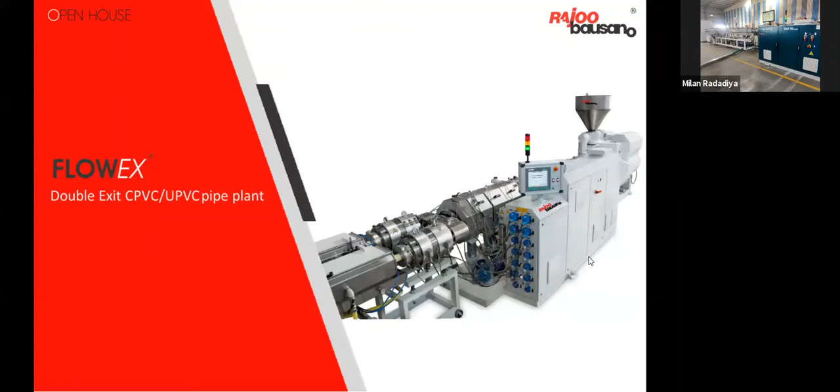And first, we are going to see our high output CPVC line. The model we are going to witness today is a FlowEx RBMD 7530 63 double exit. This is the dual exit production line, the material we are producing is CPVC, and the pipe diameter is 1 inch. When we run CPVC, the machine output will be 330 kgs per hour, and since it is a versatile machine, on the same machine we can run UPVC material as well, and with UPVC the machine output will be 475 kgs per hour.

This is a parallel screw technology. Screw diameter is 75 mm and the L/D ratio is 30:1. We are using our patented and very unique gearbox technology called multi-drive on all our twin screw extruders. So in this scenario also, we have two motors mounted on the gearbox, 18.5 kilowatt each. So in total, there is only 37 kilowatt of load on the gearbox. Power consumption we are observing on this line is as low as 0.17 unit per kg.

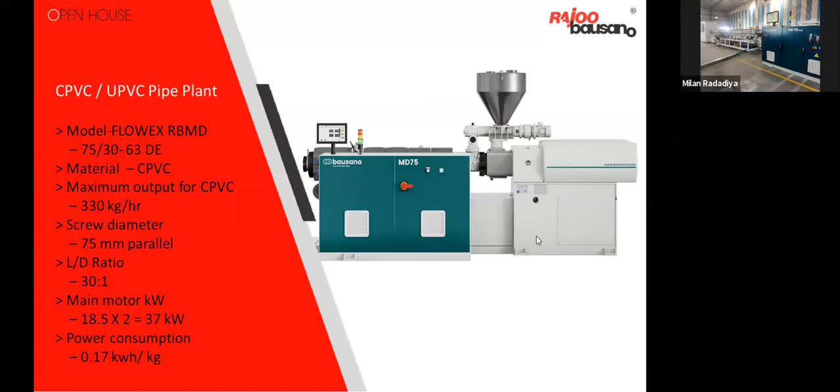For the pipe production line, the maximum output we can offer is 2200 kgs per hour, and the diameter range can be 15 mm to 1000 mm. So with this, let's move on to our shop floor and have a look at the running line.

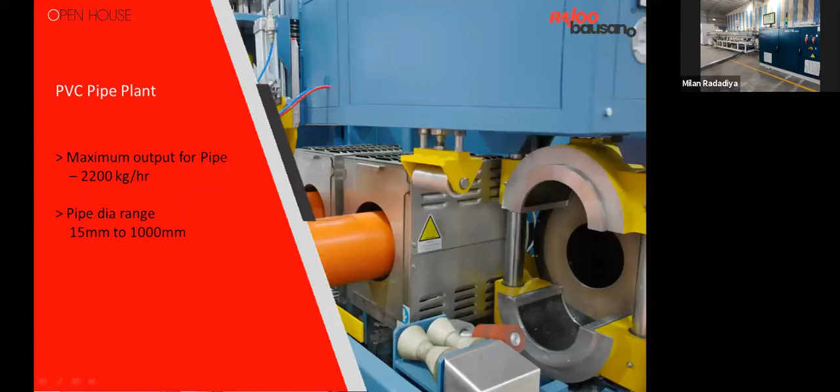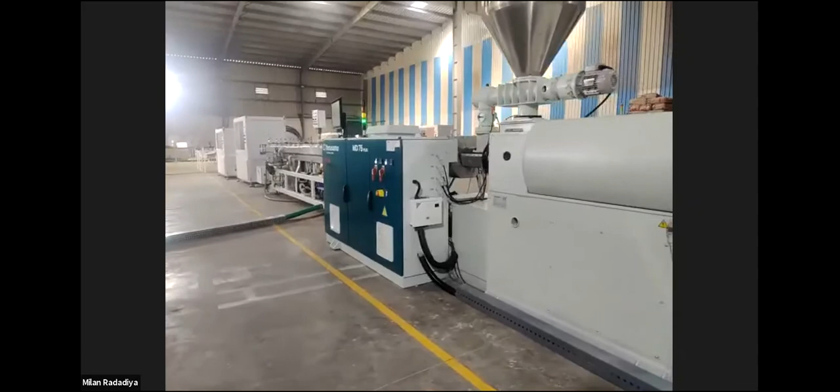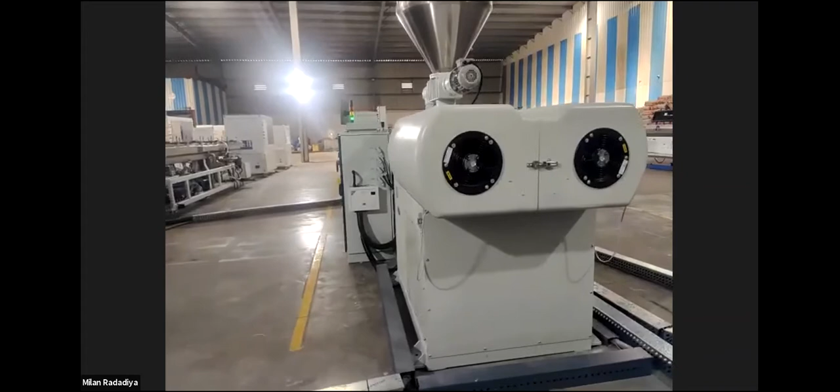Thank you, Milan. We can see here the running machine. As I mentioned, the machine model is FlowEx RBMD 7530 63 double exit. This is the dual exit line since we are running a smaller diameter of pipe. The material we are processing is CPVC and the diameter on the die head is 1 inch. We'll go through the features of this machine one by one, and at the very first, we can see here the multi-drive gearbox technology.

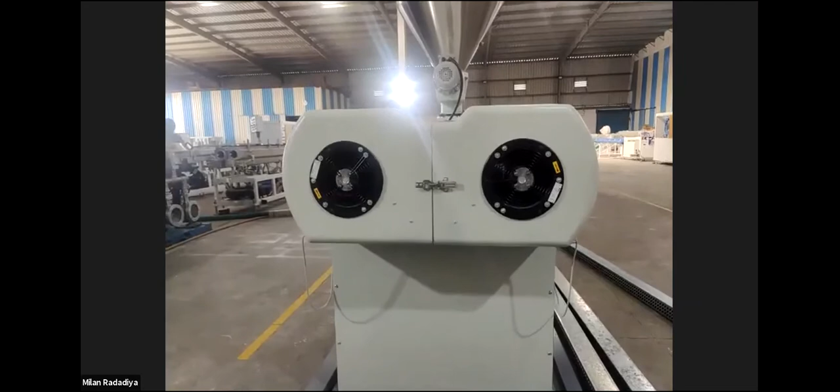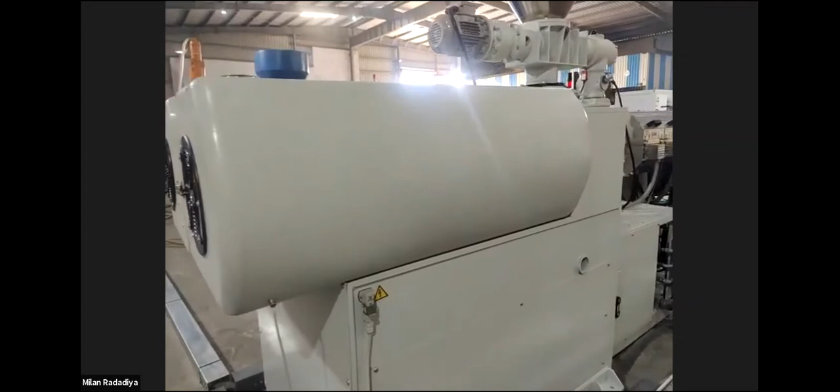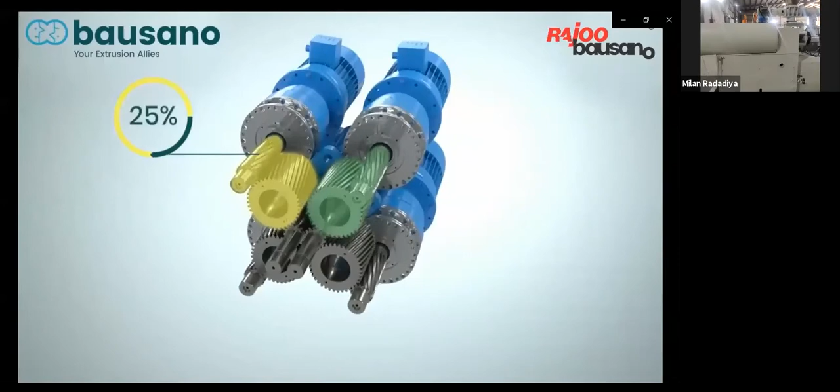Here we have a simple mechanism of a multi-drive gearbox. We can see here this is the four motor concept, four motors directly coupled on the gearbox, and whatever torque is being generated on the screw or on the gearbox is equally distributed among all the four motors. Also, the torsion stress is completely eliminated because of its simple mechanism.

Therefore, the first advantage we can observe here is we can achieve a high output with a very small amount of kilowatt installed, or a small capacity of motor installed, and we can save on power by as much as 40%. Another advantage of this technology is that since the torsion stress is completely eliminated and the torque is subdivided between both the screws, we can always observe a very high service life of critical components like the screw, barrel, and gearbox.

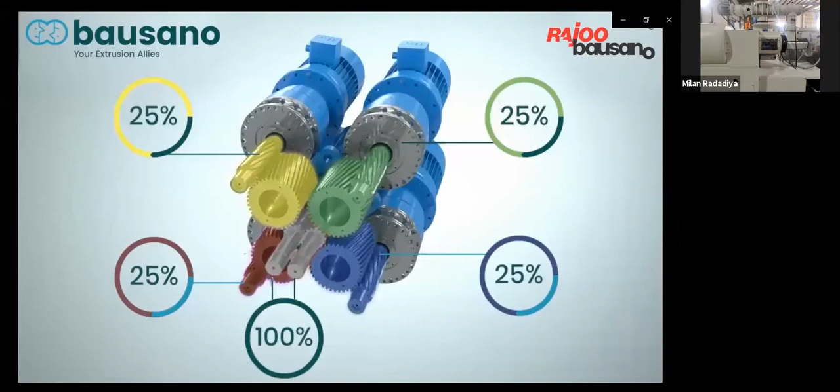So this is our gearbox technology called multi-drive, and with this we can move on to more features on the machine. Here we can see a stainless steel hopper. It is made of stainless steel for the durability of the component, and since we are using a dry blend, it is good for a free flow of the material.

Then we are using a horizontal feeding system. It can be a horizontal or a vertical feeding system according to the material we are using. Here we can see a horizontal feeding system, and the melt of the material is supported by a screw thermoregulation unit. The media we are using is silicone oil.

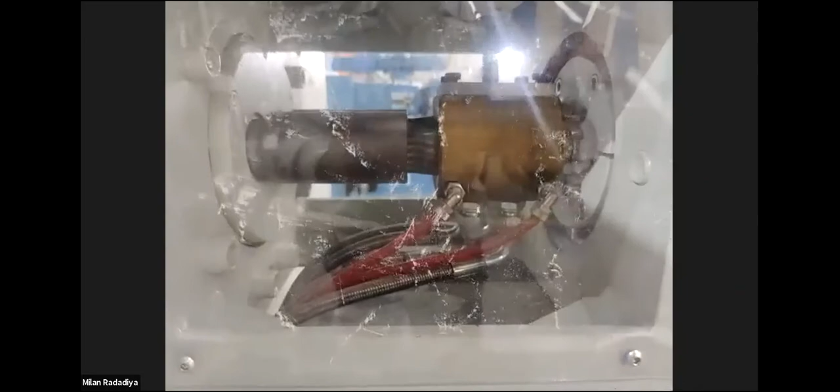Silicone oil will be circulated throughout the screw tip, and because of this technology, it will allow us to use a wide range of formulas in order to achieve the best quality of product as well as some savings on the raw material.

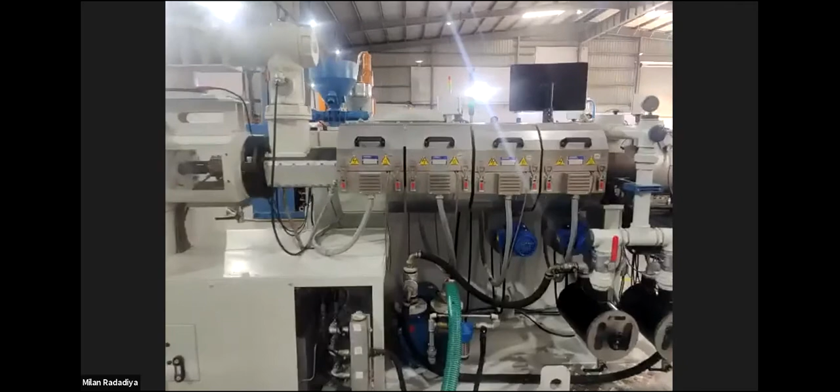You can see here the barrel heaters and the covers. These covers are also aerodynamically designed in order to keep energy consumption low. For now, we are using ceramic band type heaters. Besides that, we can also offer an induction heating system, which is nowadays a smart system to save energy on heating.

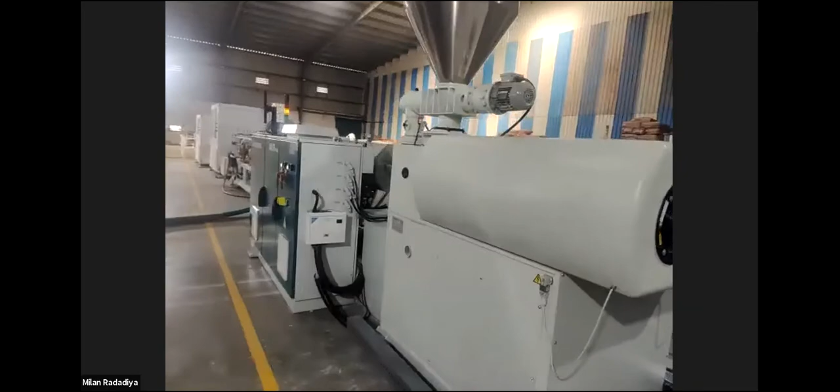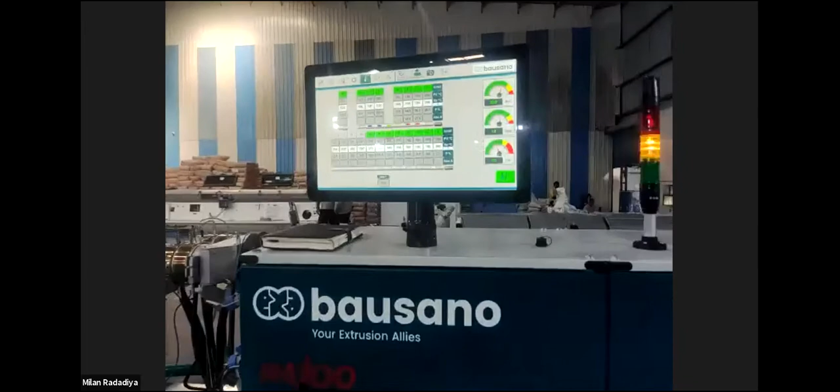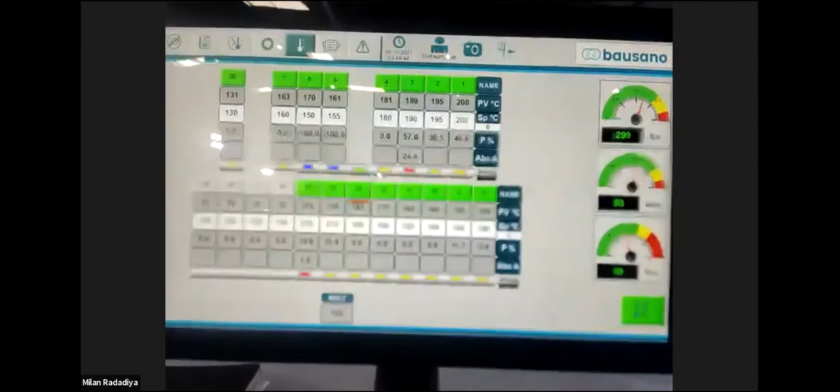Further, we can move on to the control panel of the machine. We can see here the control panel, which consists of microprocessor controls and a multifunctional touchscreen panel. Here we can have all the controls of the drive and heaters. Along with that, we have several extra features which are very unique. We can see melt pressure, we can see ampere, and the uniqueness I was talking about is the back pressure. We can also see the back pressure here.

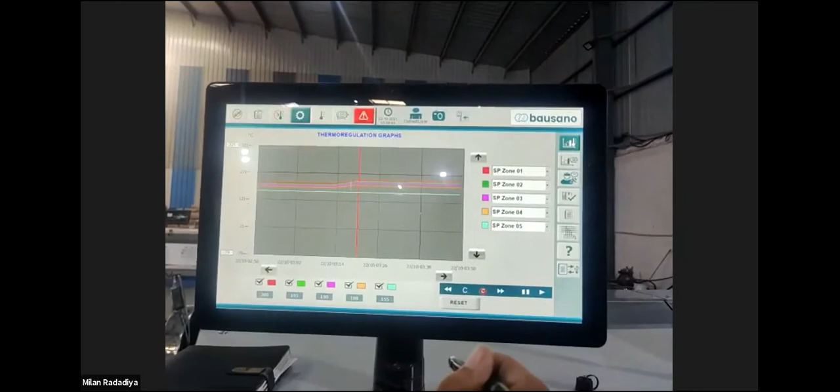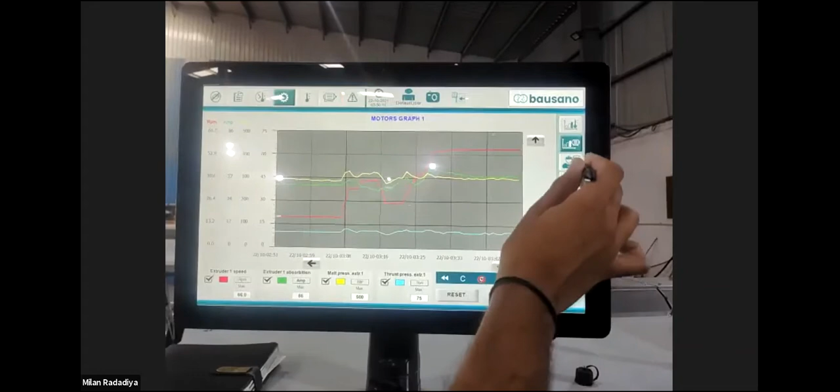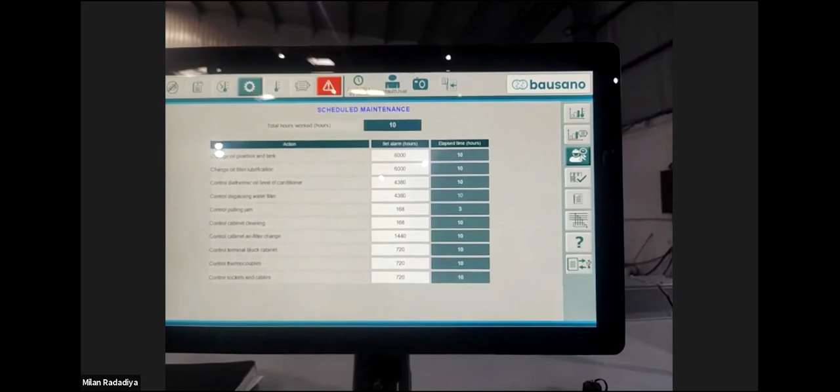On screen, we can also have a temperature profile, and the history report of the temperature profile. This is the process graph, where we can have various parameters available in graph form. This is our maintenance chart. With this, the machine can work smartly and remind us about various things like the time to change the filters or the time to change the oil or lubricants, and many more. We have a long list in the maintenance chart.

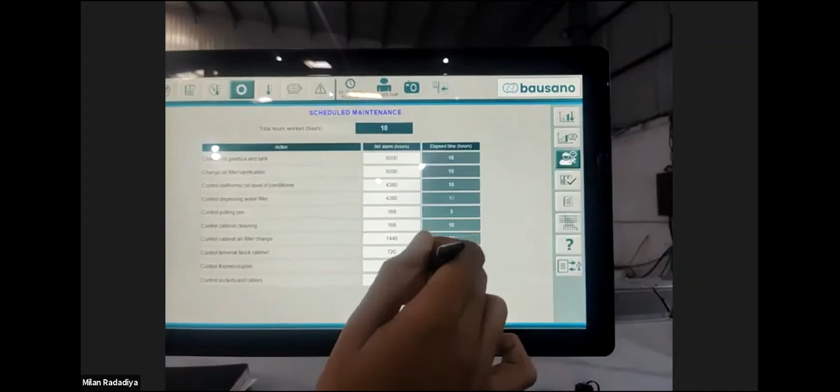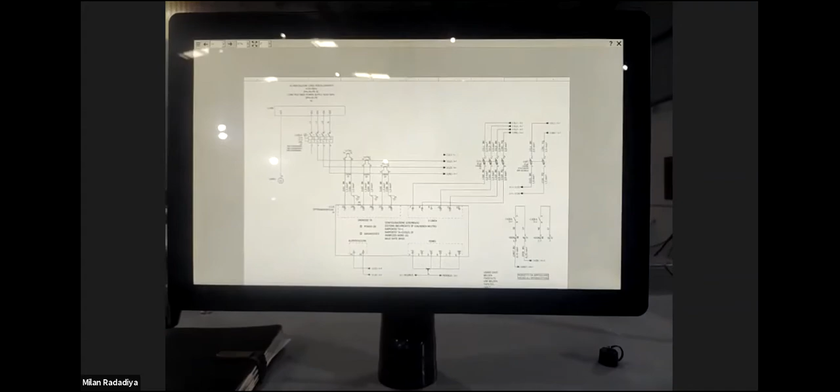We can also have a complete digital manual of this machine, and we can keep everything handy as and when required. This is the electrical circuit diagram of the entire machine, so that one can access it quickly whenever required. So as I said, it is a multifunctional touchscreen panel.

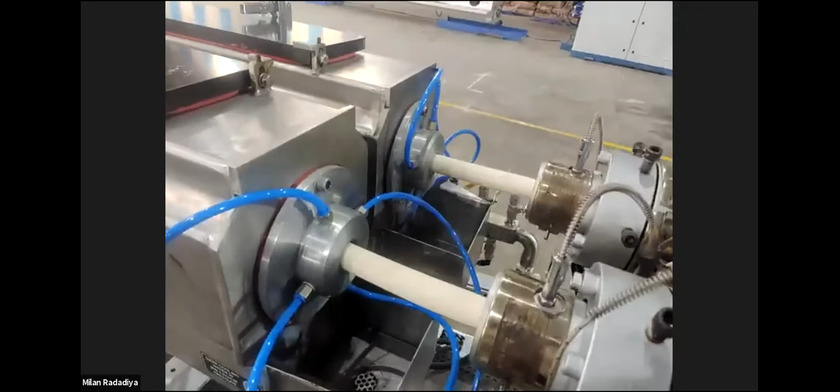Next to this, we have a very important component of this entire machine, which is the die head. This die head is specially designed for high output CPVC production, and we can achieve the flow profile of this die head. It is designed so that we can achieve a good output even with a very small pipe diameter.

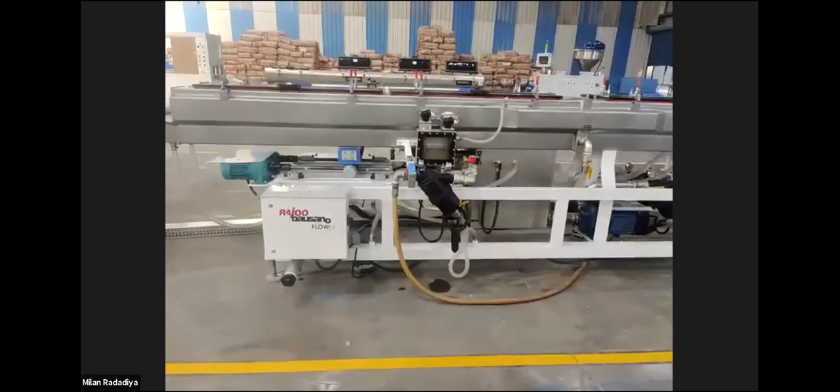Next to that, we can see here dual exit vacuum tanks. These are made of stainless steel, two independent vacuum tanks mounted on a single base frame. The design of these vacuum tanks provides ample room inside so that operators can handle the pipes during production and during startups. Also, the spray nozzle arrangements are very effective, so that we have effective cooling during production.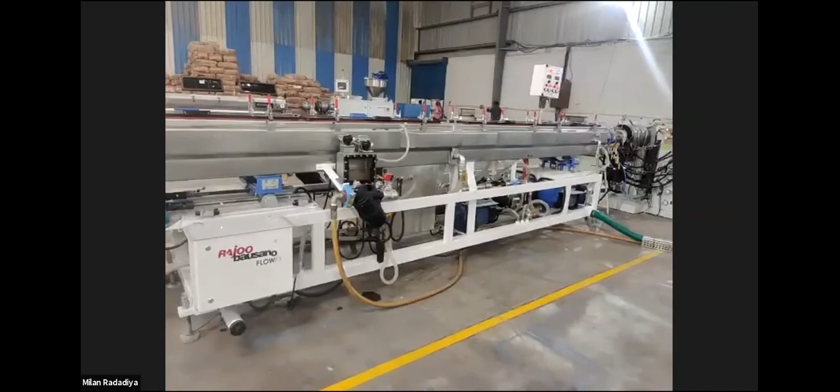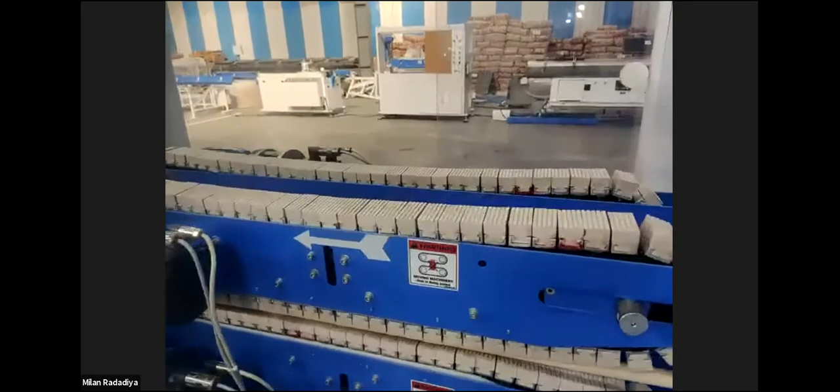Next, we have in line a servo controlled haul-off. Again, these are two independent haul-offs mounted on a single base frame. These are sturdy haul-offs driven by a servo motor, so that they can work precisely at higher line speeds as well.

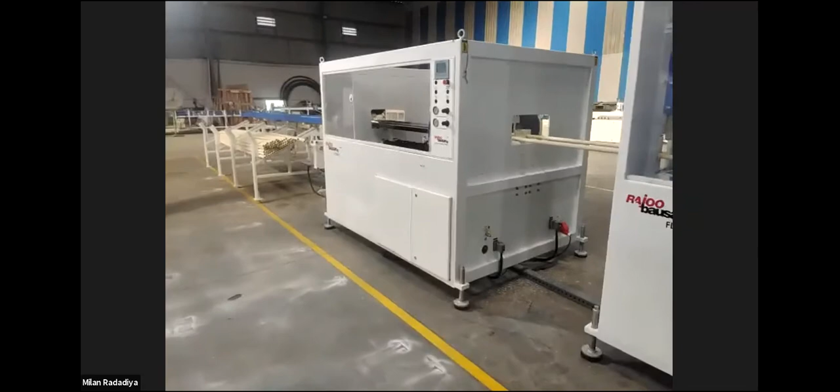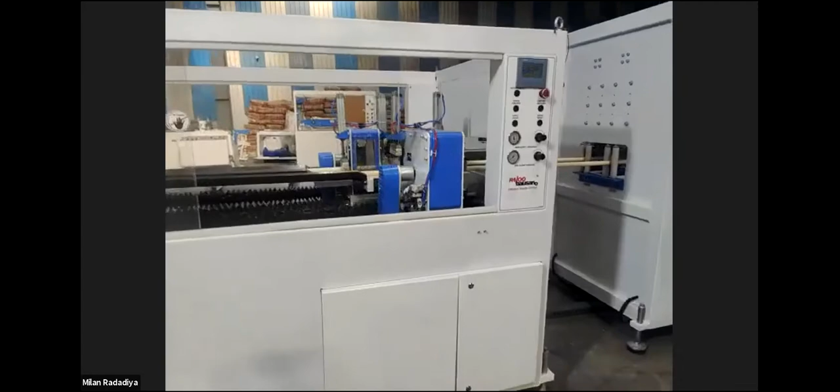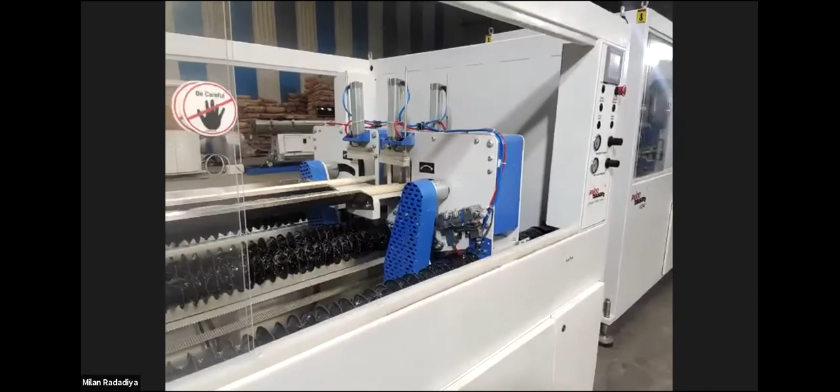Next, we have a servo control cutter. This cutter is specially designed for a high line speed, and at the high line speed we can also achieve a precise and very smooth cut of pipe. This cutter is controlled by a servo motor, and all the arrangements are with servo and the timing belt pulley. Next to that, we have two independent tilting units. So this is the entire line.

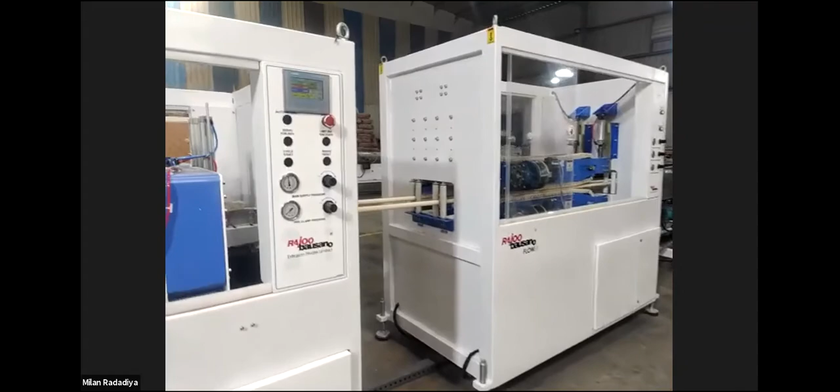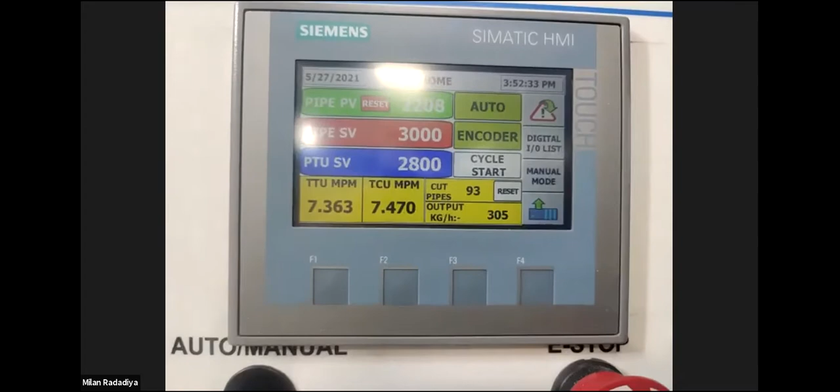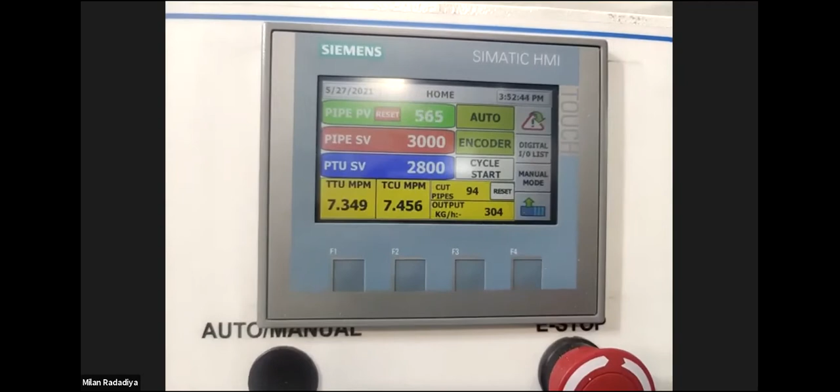And Milan, when we were going through the haul-off, looking at the line speed of the haul-off, I could figure out that the output was really good. If you can show us some parameters. So that's great. We can see here the line speed running 7-point-something meters on each side. And we can also see the output, which is running more than 300 kgs per hour. So this is something very amazing about this line, that with the CPVC, with the 1-inch diameter of pipe, the running output is 303, 304 kgs per hour.

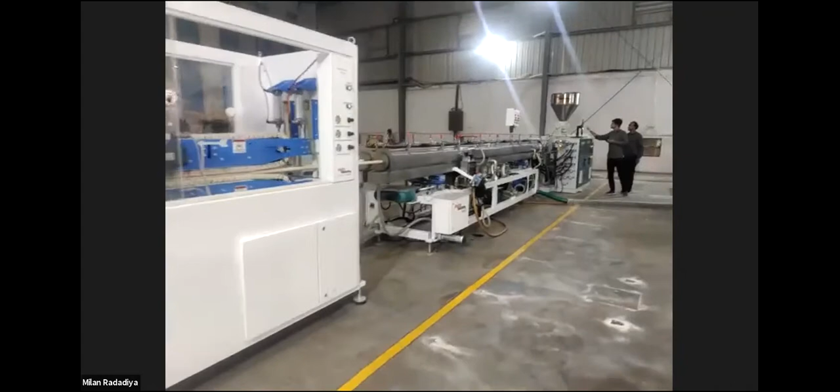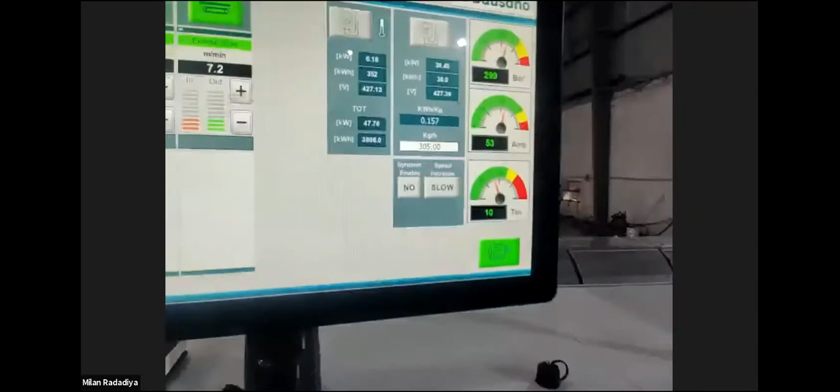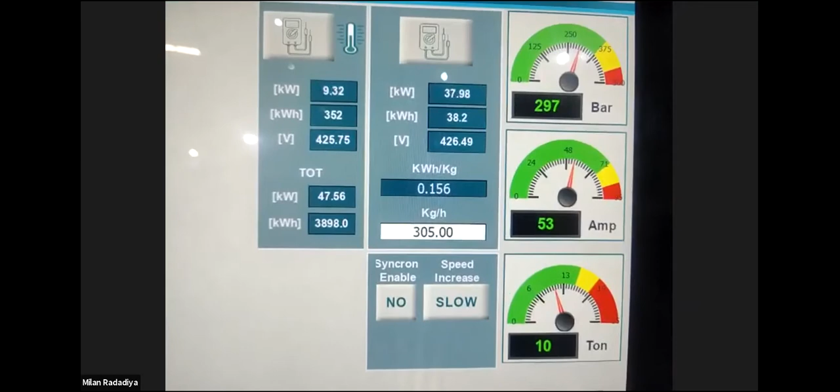Milan, we can also see the power consumption. If you can take us to the control panel on the main screen. On the main screen, we can always have various parameters like output and power consumption. And the data we can see here is 0.153. On an average, we can see 0.15 unit per kg. This is very, very low power consumption at the output of 305 kgs per hour.

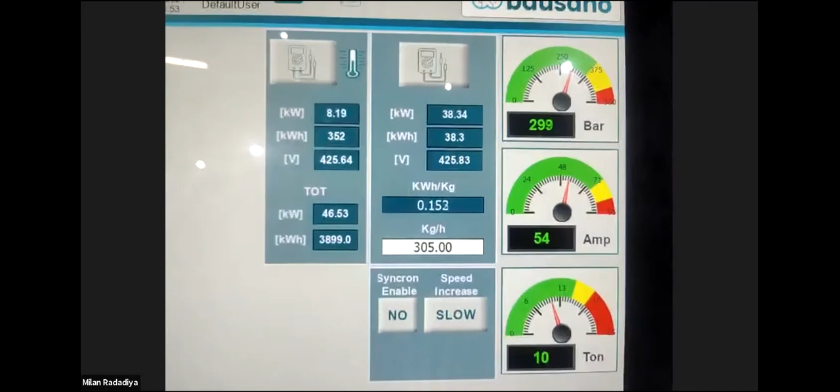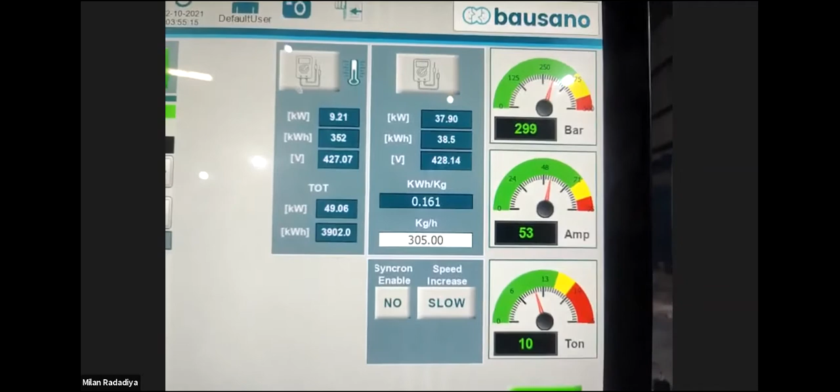Vishal, this is online power consumption. Okay, correct. So whenever the heater starts, it also jumps. Then whenever the heater is off, it will again go down. On the left hand side, if you see, there are total units. So after running the machine for 4 or 5 hours, you can exactly see the total units, which will be very, very low. Correct. On an average, I think 0.16, 0.17 can be the power consumption on this line.

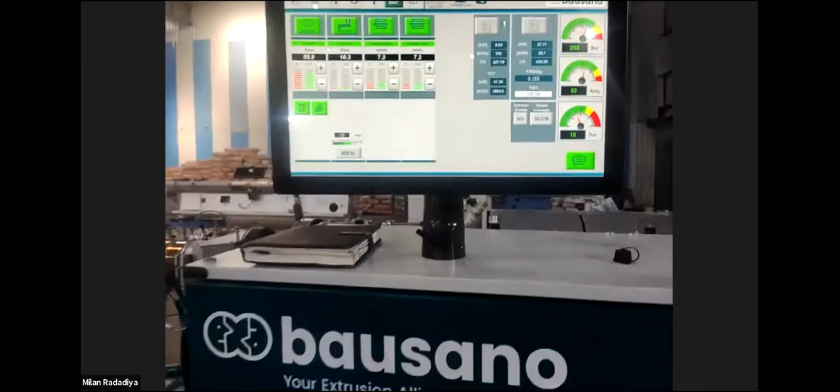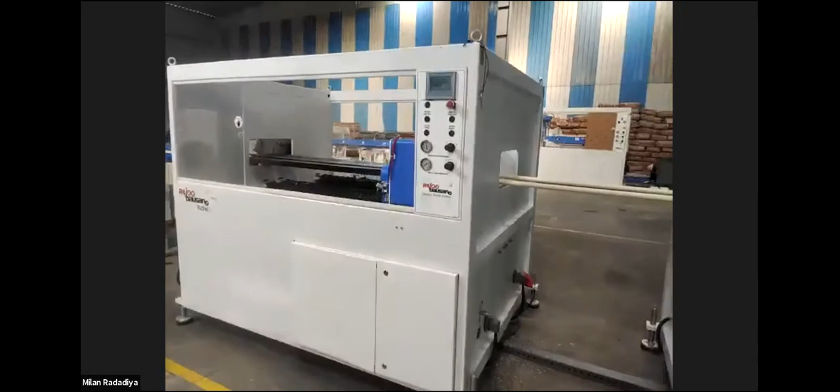Great. Thank you very much, Milan. Meantime, can we have a poll here? Milan, hello. Yes, sir. You can just put up the video on the haul-off and cutter again. Sure. I can see some of the questions. I think it will be better to take them at the end of the session. So we will note down all the questions.

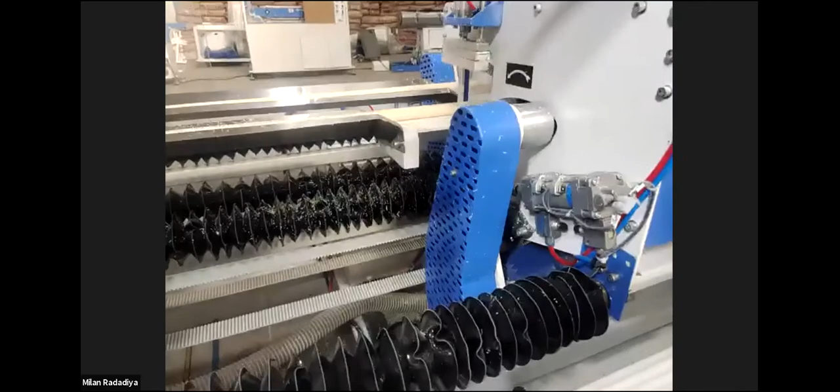See, the best thing is that this is a servo cutter and the trolley movement is by servo. So the precision is very much on the higher side. For cutting length, you can see the timing belt, which is driven by servo motors. So whenever there is a high line speed, it is always better to have servo-controlled things.

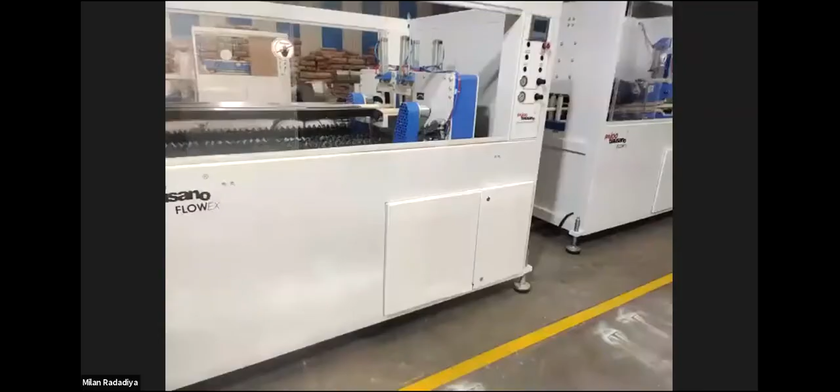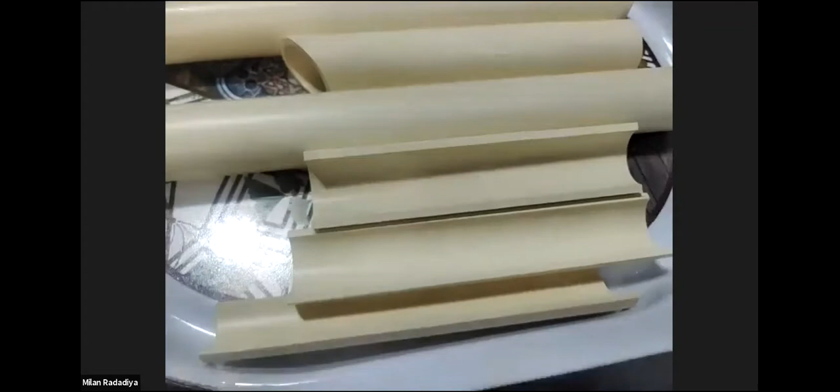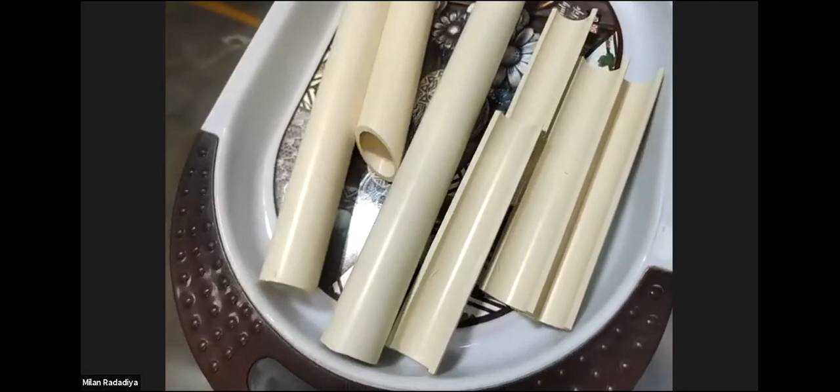Thank you, Milan. Milan, can you show some of the samples? There we can see the surface quality, which looks very smooth. Outer surface and inner surface. I can see some cut pipes also there. The surface quality is very, very uniform and very smooth, very shiny as well. So this is the ultimate result of this line at the high line speed, high output.

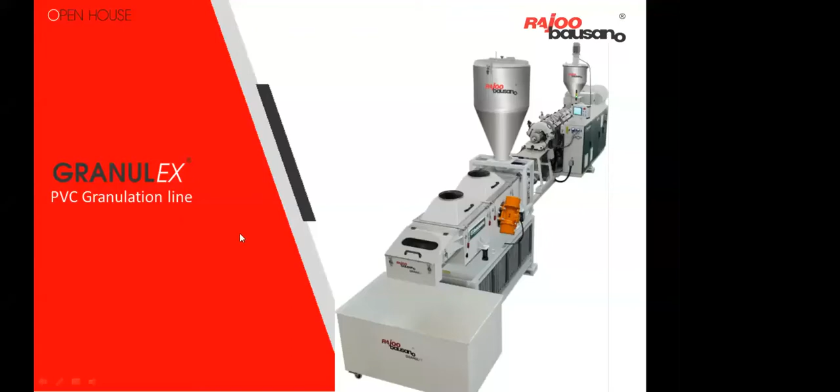Great. So it's time to move on to another product, which is again a very interesting product. It is the Granulex series. Granulex is a series of our products for the granulation of various kinds of material like PVC, CPVC, soft PVC, ABS, TPR, and many more. But today we are going to see a machine specially designed for injection molding application, I mean pipe fitting grade. And we are running the machine with CPVC material again.

The machine model is Granulex RBMD-92/25. As I mentioned, this machine is designed for UPVC and CPVC material. The maximum output we can get is 600 kgs per hour in case of UPVC. And when we run CPVC, the maximum output can be 400 kgs per hour. All our twin screw extruders are parallel screw design only. With this, we have a 92 mm parallel screw, and the L/D ratio is 25:1. On the main motor, we have 4 motors mounted, 15 kilowatt each. So this output we can achieve with just 60 kilowatts of main motors.

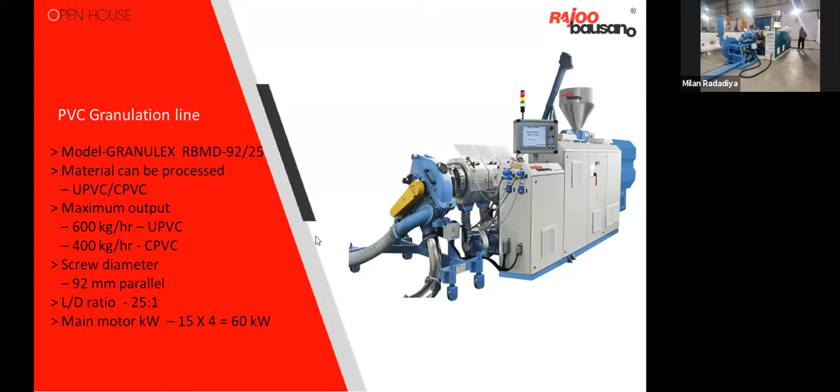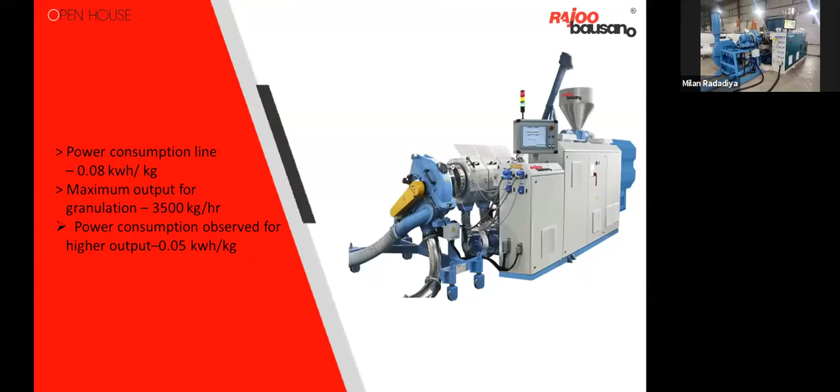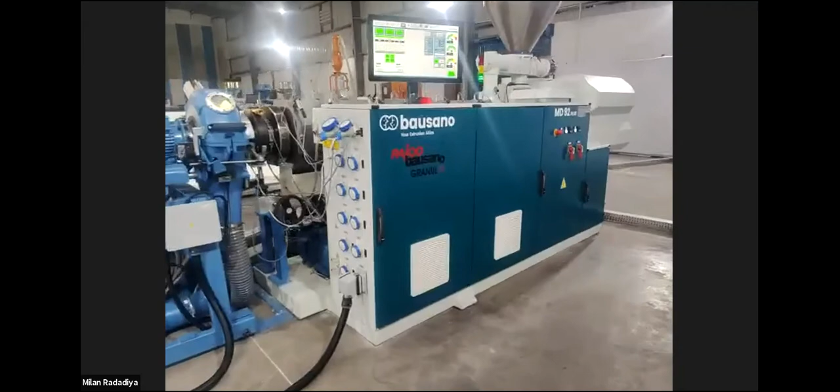Power consumption on this particular line we can observe is around 0.08 unit per kg. The maximum output line for granulation we can offer is 3500 kgs per hour. And power consumption with the high output line can be as low as 0.05 unit per kg. With this, we can move on to the running line and have a glimpse. We can see this granulation line. It is running, and the model is RBMD-92/25. This machine is specially designed for fitting grade application for both materials, UPVC and CPVC.

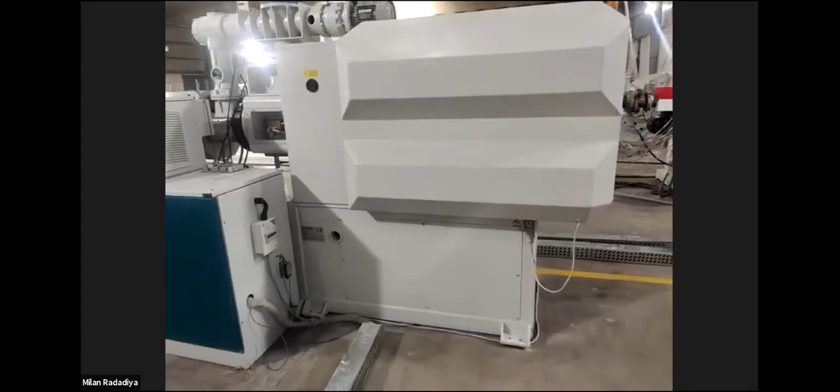As we can see here, all our twin screw extruders are equipped with patented gearbox technology, multi-drive. We can see here, this is the 4 motor concept, since the output is more than 500 kgs per hour. With this kind of technology, you can always save a good amount of power, and it can also enhance the service life of critical components like the screw, barrel and gearbox.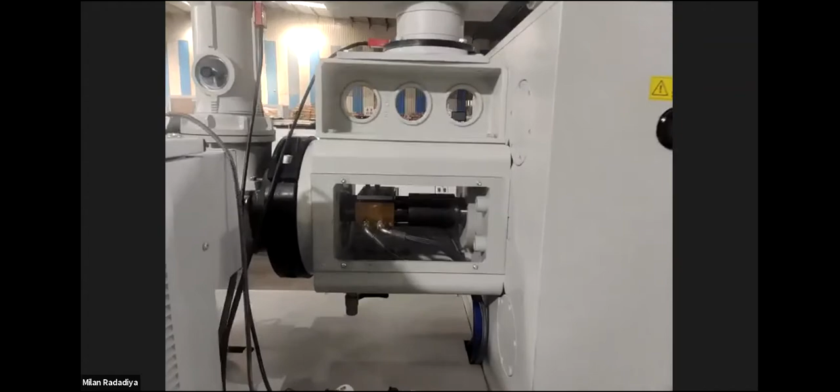We can see a stainless steel hopper for durability and free flow of the material. We can see the horizontal feeding here. In granulation, many times, according to the requirement or the kind of material we are processing, we may require a gravimetric feeding system or a volumetric feeding system, and we can offer as per the requirement. In this machine also, the melt process is supported by a screw thermocontrol unit, and the media is silicone oil.

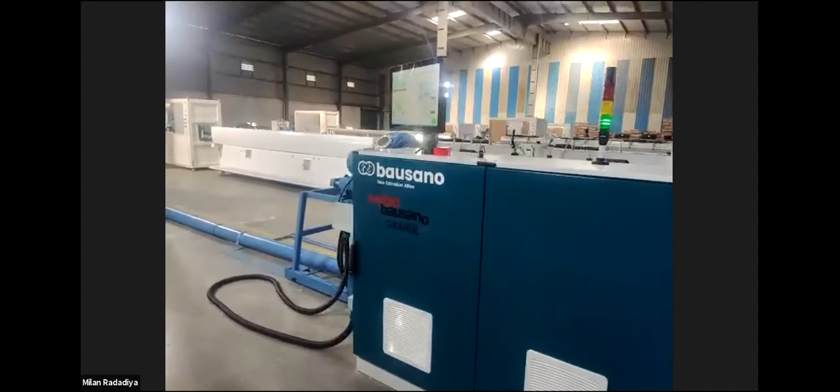This is the complete control panel of the line. And as we mentioned, all the controls are available on the screen. Again, a multifunctional screen.

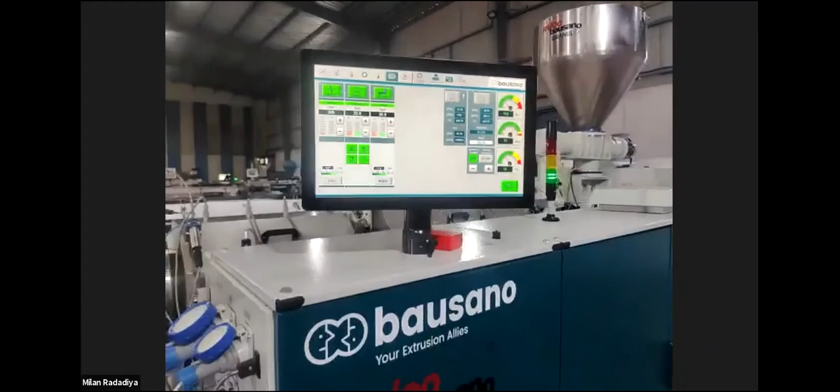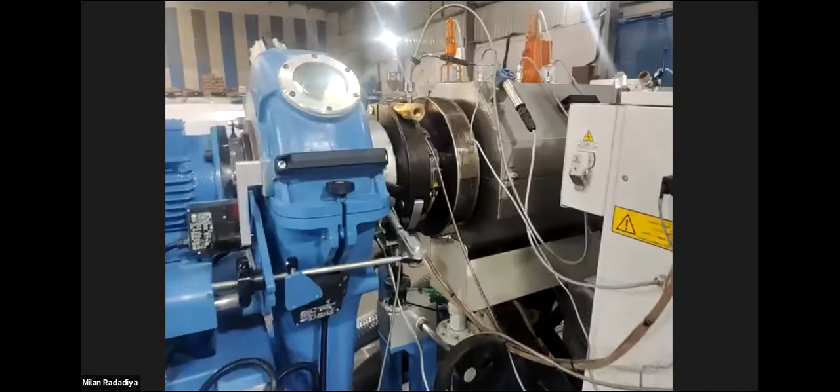And the important part of the machine is the die head and the die face cutter. This die head is made of a special alloy steel, and it's designed with a coat hanger type of mounting so that quick cleaning and restart of the machine is ensured as and when required. And then we have a die face cutting unit. This die face cutting unit is very precise, and it ensures even size of particles with no stickiness.

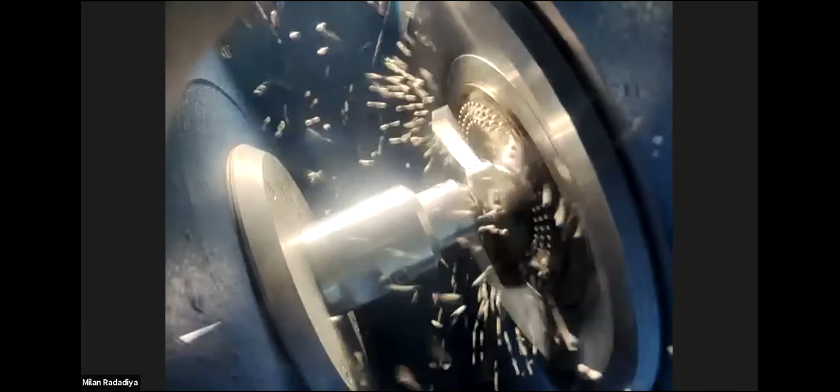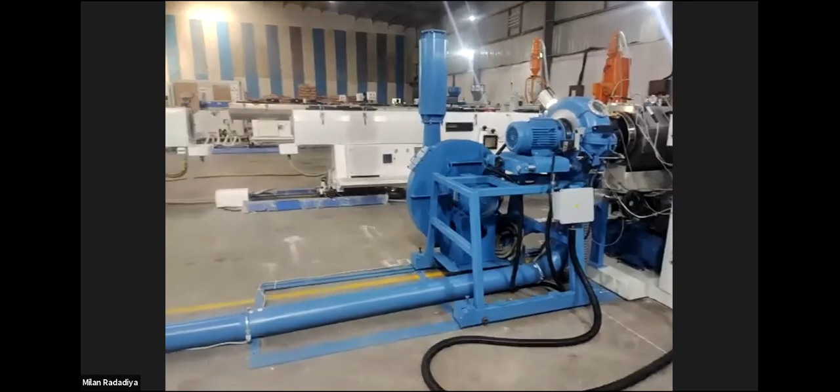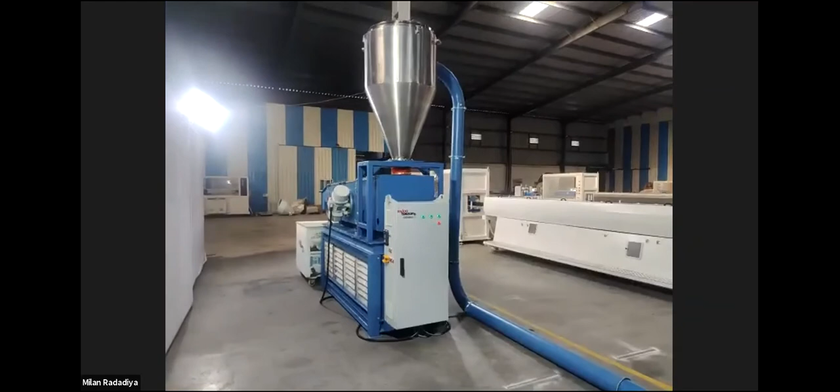And after the die face cutting unit, the granules are conveyed to the cooling unit hopper. This pipe can also be water jacketed according to the type of material we are processing or according to the production capacity of the machine. And we can see a stainless steel hopper of the cooling unit. Let me also tell you that this pipe is a telescopic type of design, so that quick maintenance and ease of operation can be ensured.

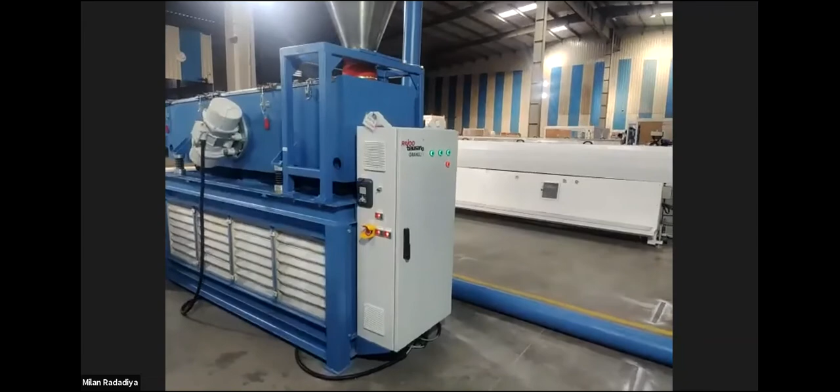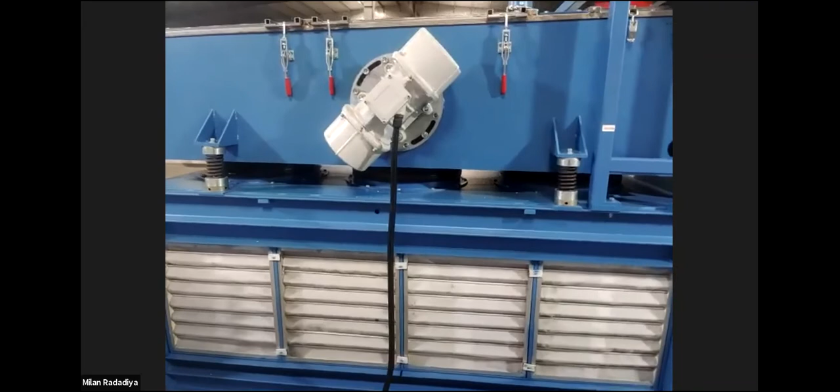Yes, we can see here the stainless steel hopper for the cooling unit, and it can also be water jacketed, so that we can provide extra cooling to the granules. Also, one set of blowers is installed at the bottom of the cooling unit, which will blow the air upwards to provide extra cooling to the granules. And I would like to inform you that in this entire process, the granules remain absolutely contactless to the water, so there is no chance of absorbing moisture in the granules.

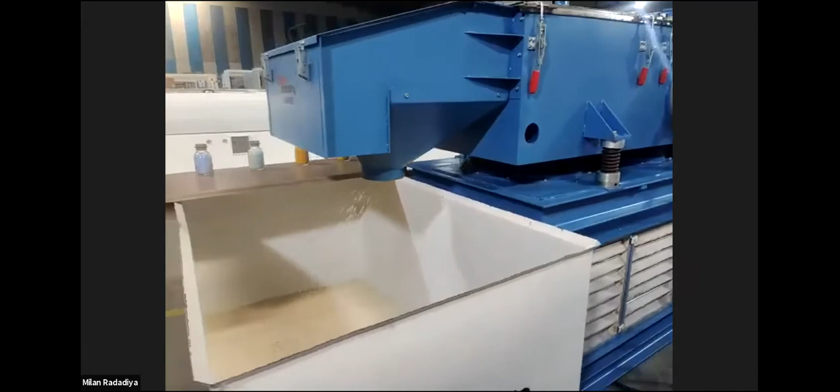And at the end, we can see here the granules with no stickiness and even size. And these granules will definitely improve the productivity of the injection molding you may have in your setup, and also enhance the mechanical properties of the fittings.

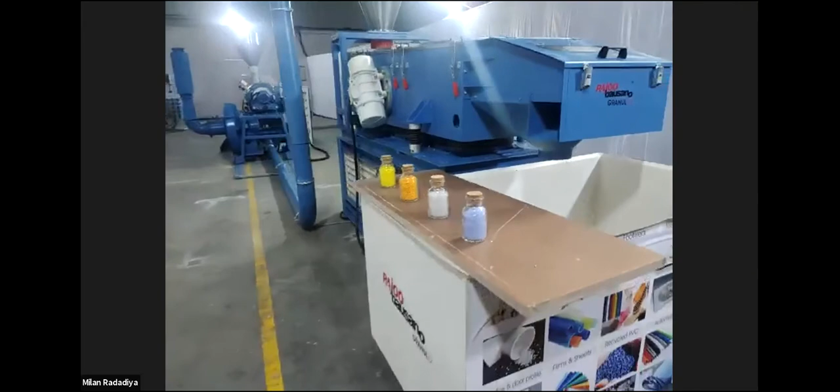So there we have gone through the line. We have seen two state-of-the-art products by Rajoo Bausano. The first line we have gone through is the CPVC pipe line with high productivity, and the other line we have gone through is the CPVC granulation line.

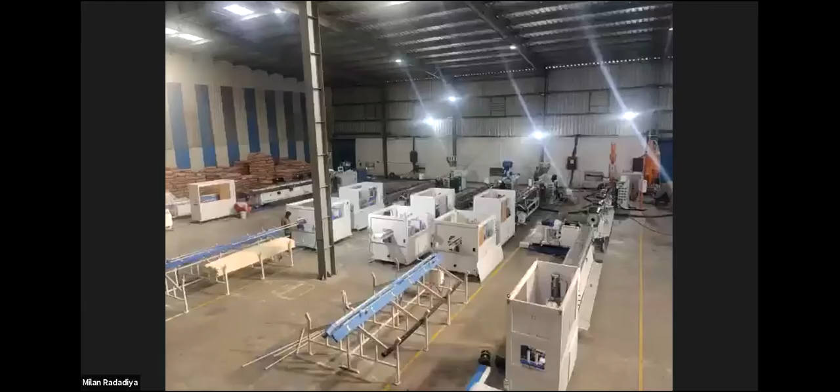So now you can see all the lines which are under trial at our factory. You can see the very first line on your left hand side, that is the CPVC pipe plant, with pipe OD up to 4 inch, going to our reputed customers. The other line is what we witnessed now. The third line is again the CPVC double exit line. The fourth line is again a CPVC double exit line, with an output level of 220 kilogram maximum.

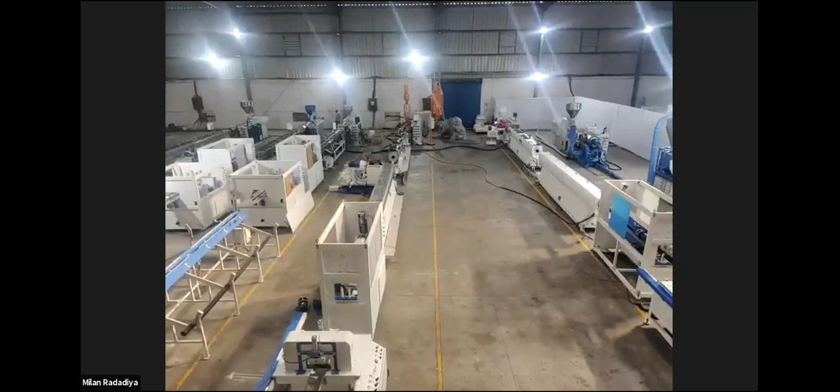The other line is an HDPE line for 500 kilogram per hour. It is a special line with a wire insertion unit, since in the new BIS level, they have included some wire insertion. So that is the line. Then the white one, you can see the downstream, that is an HDPE line up to an output level of 250 kilo. The granulation line, which we